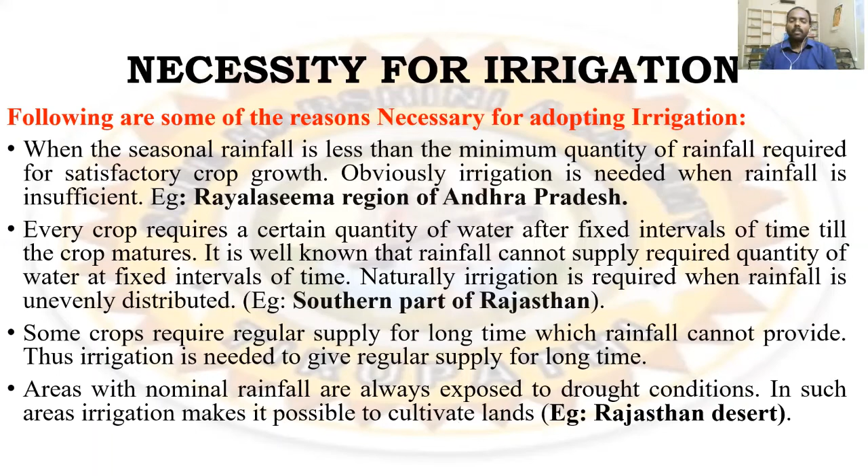Irrigation improves the yield of crops and makes people prosperous. It makes countries self-sufficient in food requirements by producing bumper crops and thus improves the status of the country also. Irrigation water is taxed when it is supplied to the cultivators and thus adds additional revenue to the government. It supplies water to the fields as per requirements. Sometimes irrigation canals provide drinking water facility to the town or village nearby.

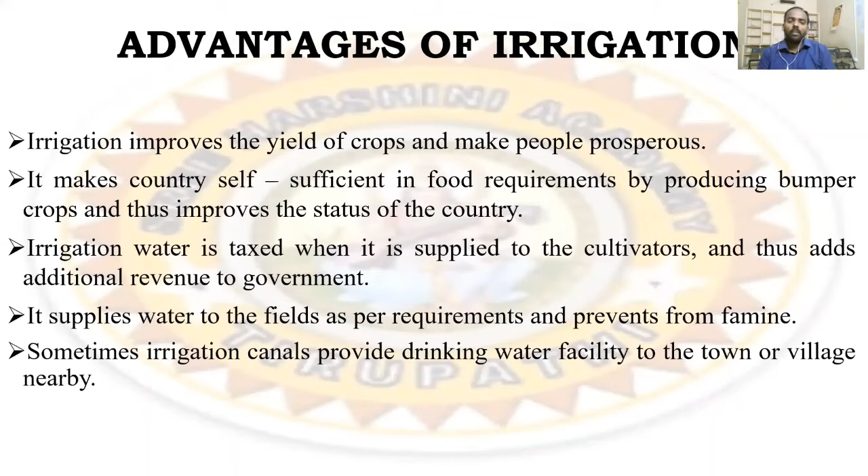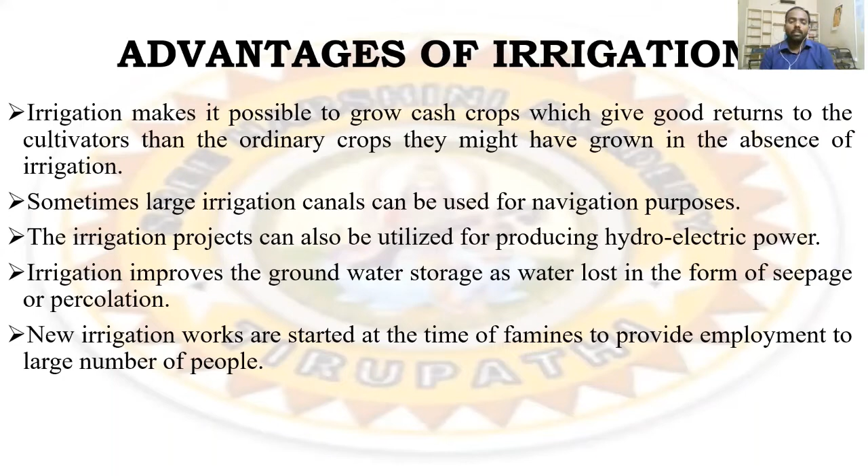So there are some more advantages. Irrigation makes it possible to grow cash crops which give good returns to the cultivators than the ordinary crops they might have grown in the absence of irrigation. Sometimes large irrigation canals can be used for navigation purposes. The irrigation project can also be utilized for producing hydroelectric power. And irrigation improves the groundwater storage as water is lost in the form of seepage or percolation. New irrigation works are started at the time of famine to provide employment to a large number of people. These are all the advantages of irrigation.

Coming to disadvantages of irrigation, there are some disadvantages also. So we have to see what they are. Continuous irrigation leads to excessive seepage, which causes waterlogging of that area. Excessive seepage of water forms marshes and ponds all along the channels, which give rise to harmful diseases like malaria. Waterlogged areas lose fertility due to excessive irrigation and more money is required to make them fertile again. It lowers the temperature and makes the locality damp.

Under irrigation projects, valuable residential and industrial land is lost. In irrigation projects, residential and industrial land is lost. Irrigation works require a lot of investment at the beginning.

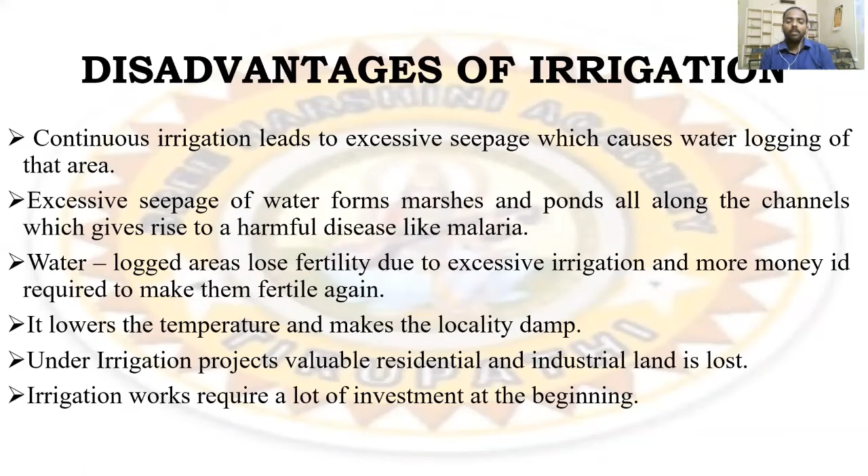These are some disadvantages of irrigation. Coming to different types of irrigation. Irrigation is mainly divided into natural irrigation and artificial irrigation. Natural irrigation means due to rainfall or inundation canal system. It can be divided into three types: flow irrigation, sprinkler irrigation, lift irrigation.

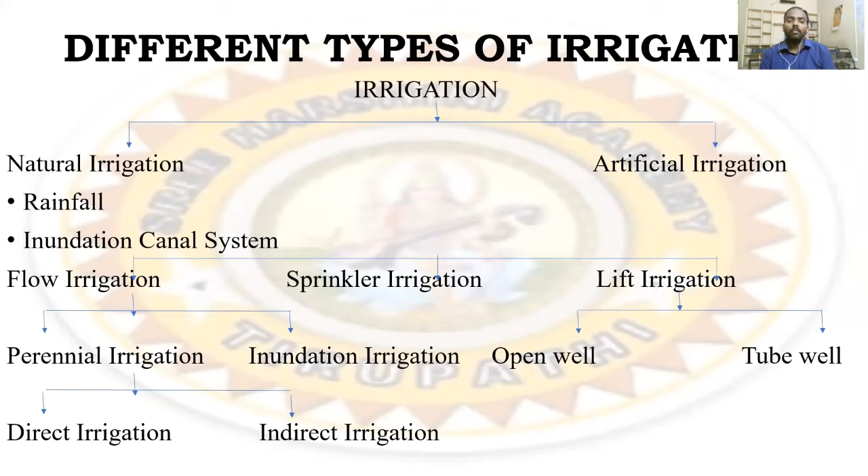Flow irrigation can be divided into two types: perennial irrigation and inundation irrigation. Lift irrigation can be divided into two types: open well irrigation and tube well irrigation. Perennial irrigation is also divided into direct irrigation and indirect irrigation. These are the different types of irrigation. So next, let us see them one by one.

First, natural irrigation. In this type of irrigation, water is supplied to the fields without constructing any engineering works. Such type of irrigation is called natural irrigation. In a very broad sense, natural rainfall may be included in this type of irrigation.

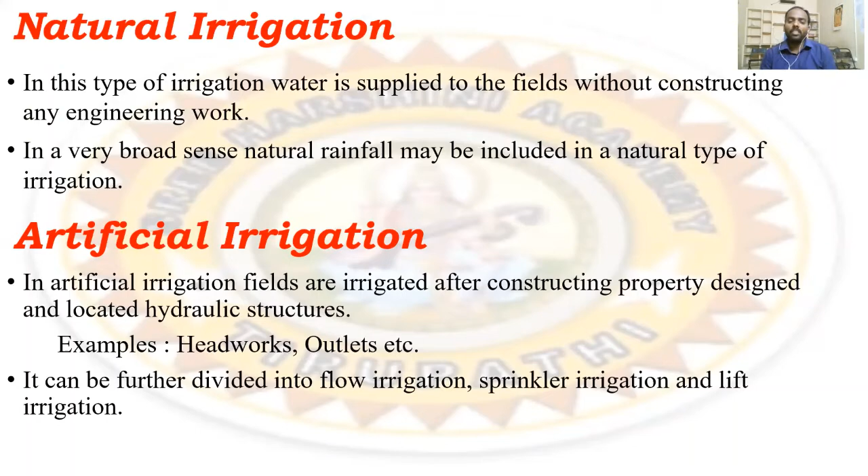Next, artificial irrigation means fields are irrigated after constructing properly designed and located hydraulic structures, for example, headworks and outlets, etc. It can be further divided into flow irrigation, sprinkler irrigation and lift irrigation.

Next, coming to perennial irrigation. In this type of irrigation, flow of water will be available continuously throughout the year. Hence, the water required for irrigation is supplied throughout the crop period according to the requirements. In this system, some storage works such as dams are constructed to store the water during rainy season and supply the same to the crops as and when required.

Next, inundation or flood irrigation. When floods occur in a river, the surrounding area is submerged under water. After thorough saturation, the water is drained off before planting of the crop. The moisture stored in the soil is supplemented by rainfall or occasional minor wettings, which bring the crop to maturity. This method is also known as flood irrigation.

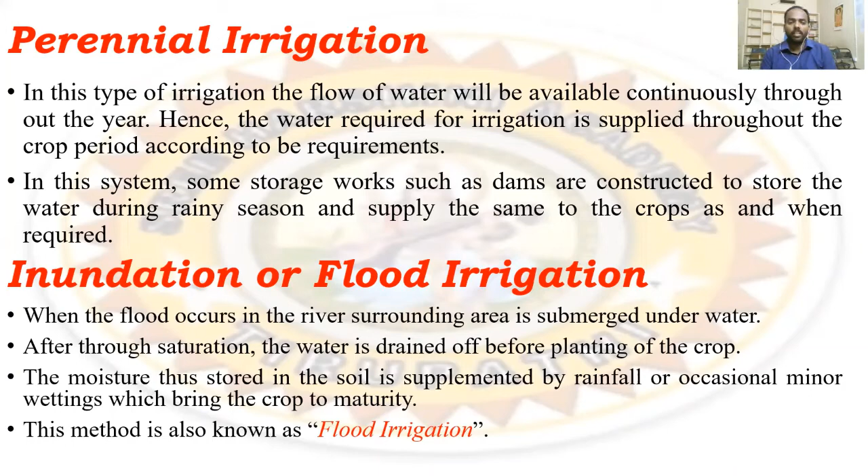Next, flow irrigation. When the irrigation water can be conveyed to the land by gravity, it is known as flow irrigation. In flow irrigation, water flows in a channel directly from the temporary or permanent storage of water. Flow irrigation is further divided into perennial and non-perennial irrigation.

Coming to lift irrigation, when the water is available at a lower level and cannot be supplied by gravity, under such circumstances, water is lifted up from the source by mechanical means such as pumps. Wells are a good example of lift irrigation.

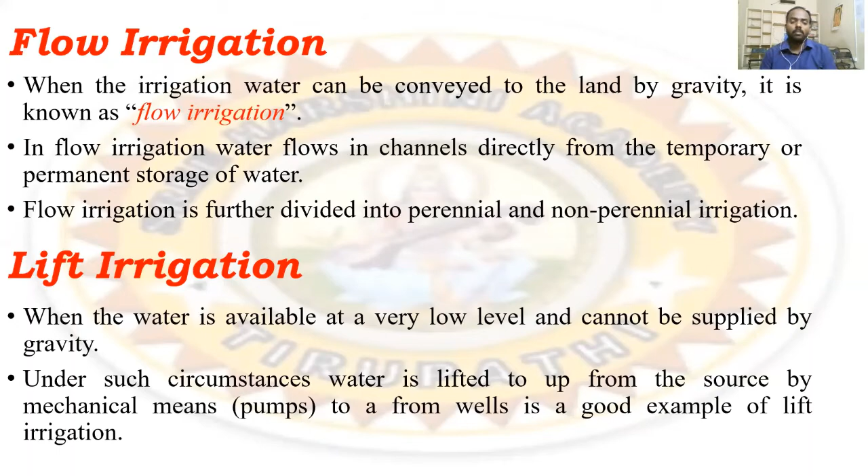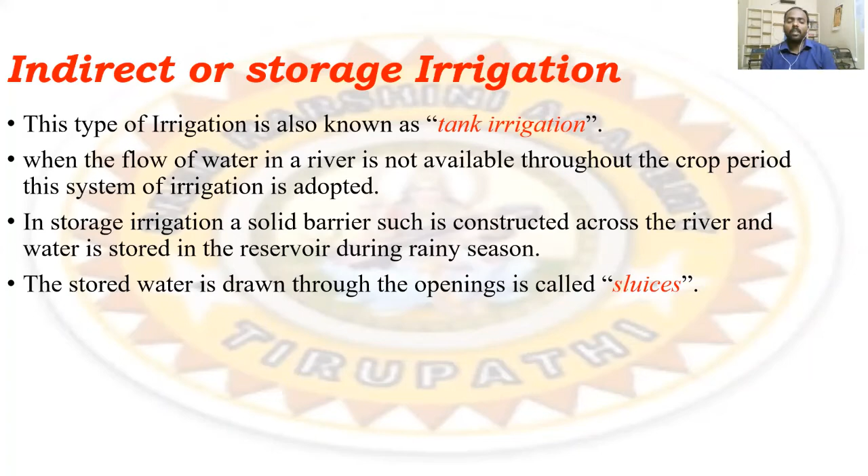Next, direct irrigation. It is also known as river canal irrigation. In this system, a barrage or weir is constructed across the river, which causes a rise in the water level of the river. Then the water is conveyed to the fields by canals taking off directly from the river. Generally, this scheme is of smaller magnitude since there is no regulation over the supplies. This system is used in plains and deltas.

When the flow of water in the river, which is available throughout the crop period, is always more than the requirement of the area to be irrigated, then only direct irrigation is possible.

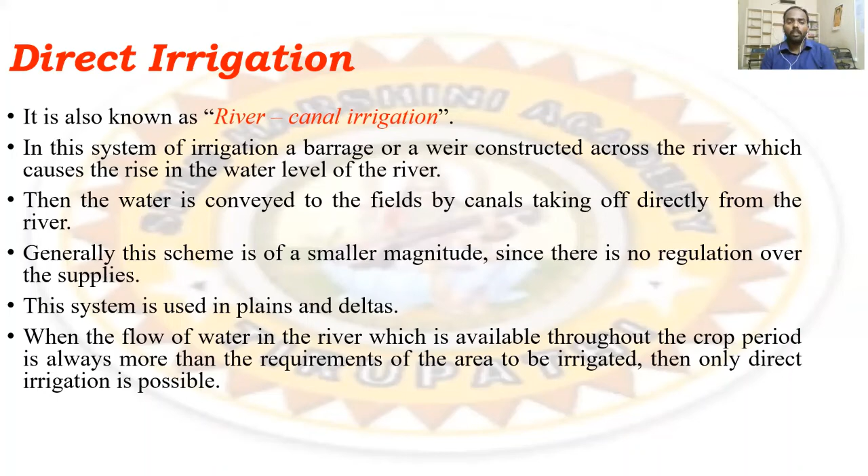So these are all the different types of irrigation we have explained till now. So this is all about the introduction part of irrigation. The topics we have covered till now are introduction to irrigation, necessity of irrigation, advantages and disadvantages of irrigation, and different types of irrigation.